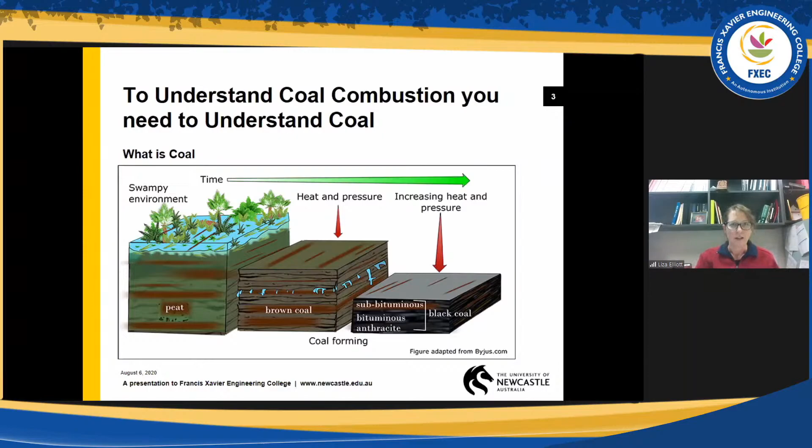The coal that does form is a function of where it's made. Coal generally is made in boggy areas, areas where water covers the ground pretty consistently. If it forms in areas where the ground is completely submerged to a large depth for a very long time, you have no oxygen content and you end up with putrefied, muddy material.

If it's formed in dry forests, rotting occurs, and so anything that does form to coal is usually very woody or has a large amount of resin in it. The places in between, where water comes and goes or is there at low levels across the ground, is really where peat forms, and that's what turns into coal. So you end up with humic material that eventually, with time and pressure, becomes coal.

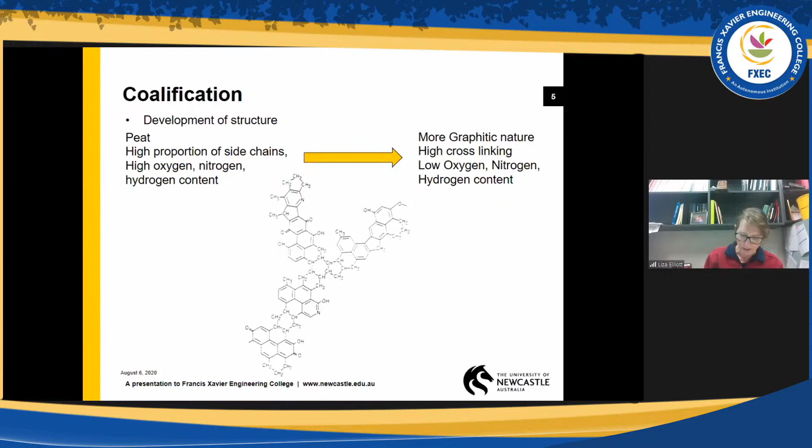So as you become more coal-like, or the rank of the coal increases, you're going to lose things like moisture - it's going to contain less moisture. You're going to lose the volatile content, and that's the stuff that will come out of the coal when you heat it. Those are the low molecular weight hydrocarbons, the things that are hanging off the side, and the things that bond between the rings of the aromatic rings.

You're also going to increase your fixed carbon content - this is the actual rings, the carbon in the rings that you've got in your coal. That's going to increase as the coal becomes of a higher rank, and the actual energy associated with your coal will increase as well. The vitrinite reflectance is a measure of how it reflects light, and that is what is used generally to determine what rank your coal is, or how close to graphitic in nature it is.

The other thing I should say is as you increase in rank, you will decrease the ash content. So things like sodium and potassium, which are very common in low rank coals, are not so common in the higher rank coals. They're things that are usually attached to those carbon chains, so you will lose them as well.

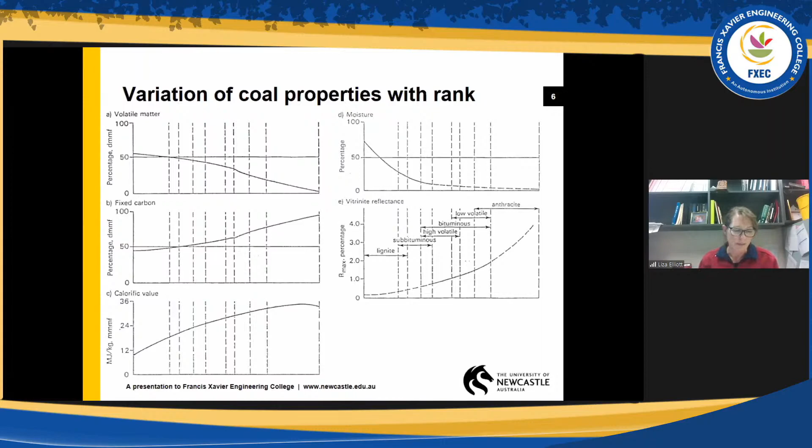So generally when we're talking about coals, we're trying to talk about their rank - so we're talking about that amount of rings in the coal structure. A lower rank coal, a lignite or a brown coal, will have more interconnecting chains, and they will have far more ash and far more moisture.

So this type of graph which we have here is called a Seyler's chart. This was developed by a British geologist, and most coals will fall into these ranges, although classification of the coals does vary from country to country.

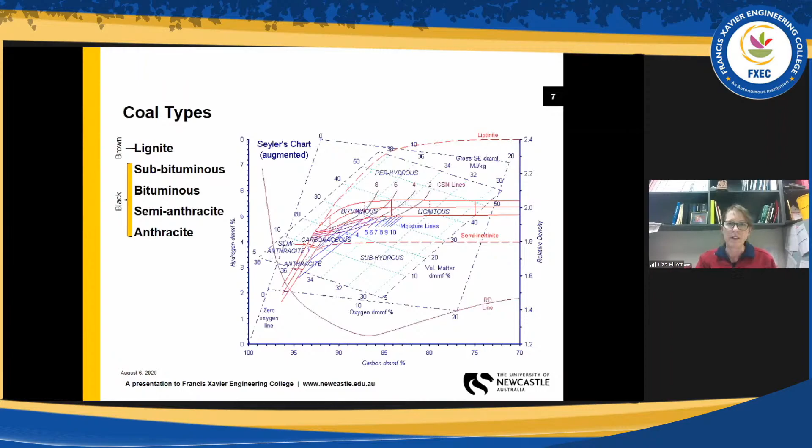But within a coal, there are different things as well. Within the carbon structure, there are things that will change based on where that coal has come from, or what part of the plant that coal has formed from. These are called the macerals. Generally, a geologist will look right down to the fine grain to find out which bit has come from where, but us engineers tend to work on the group.

We'll be looking at the liptinite content, which in America is called exinite, the vitrinite content, and the inertinite content. The liptinite content is the most reactive part of the material, but in Australian coals there's usually very little of it. The vitrinite content is the next most reactive part, and the inertinite content is the least reactive.

It was originally called inertinite because it was considered very inert and didn't do anything. But in the last 20 to 30 years, they've shown that inertinite has quite high reactivity, not as high as vitrinite. Vitrinite and inertinite have actually been found to overlap - the lower, less reactive parts of vitrinite will be less reactive than the highest reactive parts of inertinite. But in general, on average, vitrinite is more reactive than inertinite, and the reactivity of these materials changes depending on the rank of the coal.

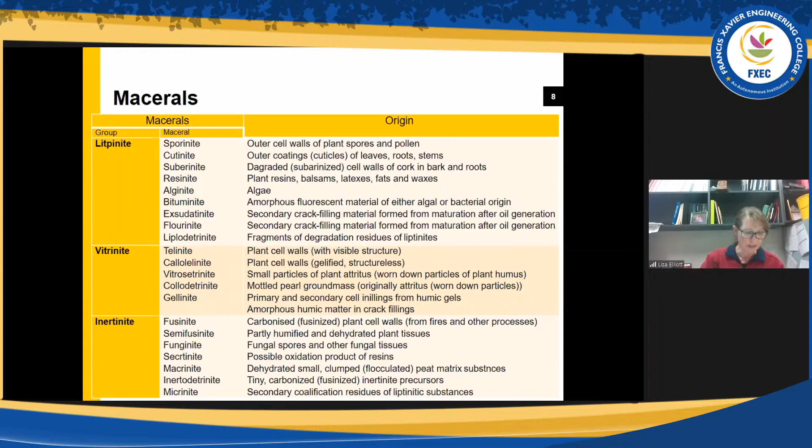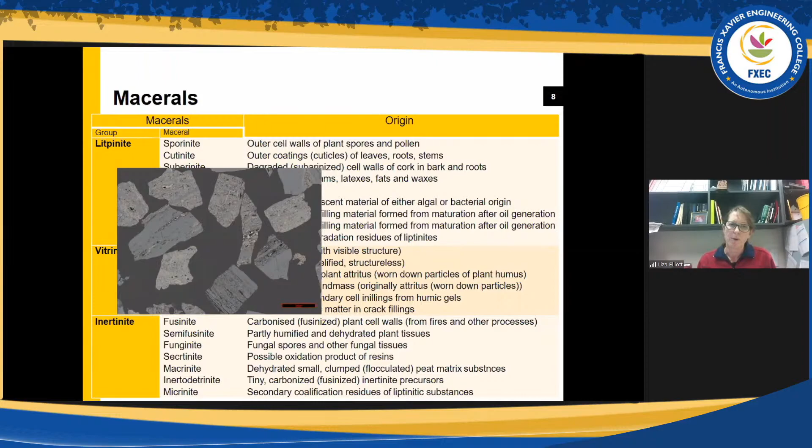If we look at the coal under a microscope, you'll see particles that kind of look the same. But the big point here is if we divide them up into vitrinite and inertinite, which we will here - the yellow ones are the inertinite, the green ones are the vitrinite, and the red coloured parts are minerals. You can see that some particles are all inertinite, some are all vitrinite, but there are also particles that contain both.

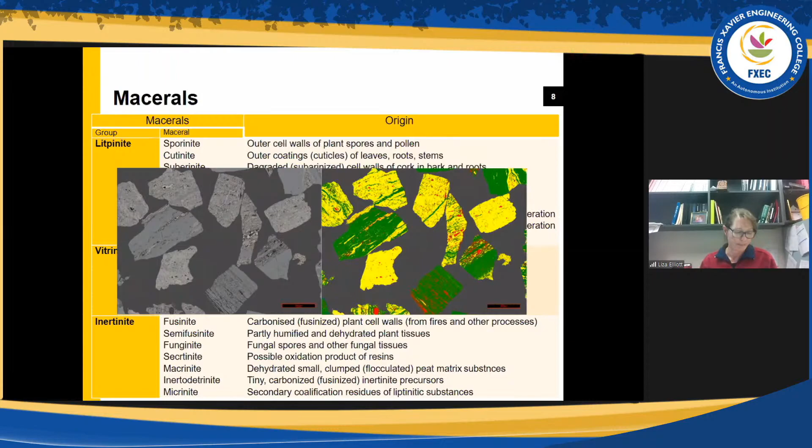The really big point to take away from this is coal is not a single material - it's a range of material. In fact, every particle in the coal will differ, so you can never talk about coal as one material. It always is a range. Quite often the issues you come across because of the combustion of the coal are a function of one part of the coal, not the whole lot, though most people will talk about the coal as an average. So coal is not a simple material - don't think of it as such.

On top of that, within those coal particles there's also minerals. This is an SEM image of a coal sample - you can see the dark red material is the coal, the carbonaceous material, and all the other colours are the minerals in the coal. It's not a consistent colour across it, which shows that the minerals are there in individual particles, or as particles on their own where they've been liberated from the carbon material during crushing. So again, you can't look at coal and say it's an average material - every bit changes, and you really have to be considerate that it's a heterogeneous material.

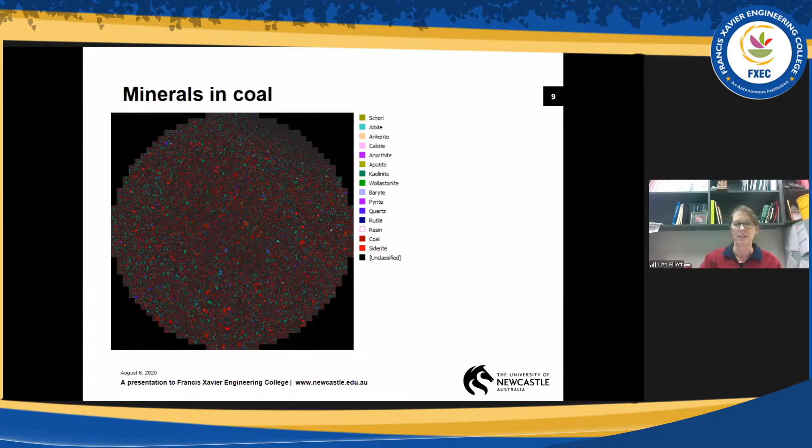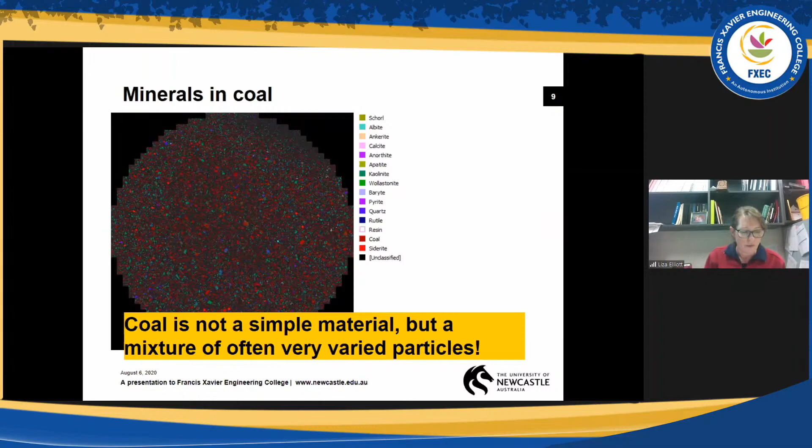So we know what coal is now. Where do we use it?

Coal's two main largest uses are power generation and steelmaking. Power generation in Australia is generally done in what's called pulverised fuel boilers, and I think that's pretty much the most common type of boiler around the world. In these, coal is fed through the burners into the radiant section, which is this section here - the radiant section is any part that sees the flame. The combustion gases then leave the radiant section and head up through the boiler, through this area here, and then out.

The boiler is really a very large heat exchanger. Each surface of the boiler, all the walls, are covered in tubes. In the top area, in the convective bank and the economizer, these areas here, the tubes hang down into the gas stream in an effort to get as much heat out of them as possible. Those tubes raise steam, and the steam is then taken to a turbine to generate electricity.

So the things to note about using coal here is that it's a combustion process - that is, it's an oxidizing process. There's always excess oxygen, so the coal will always be looking to burn out.

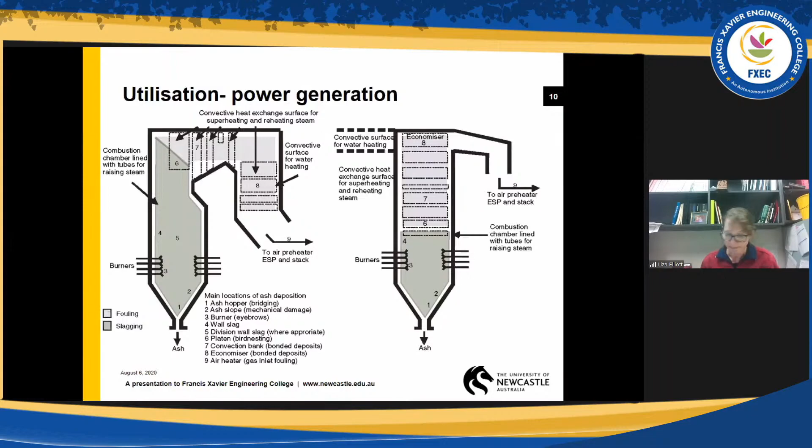The other use that we predominantly use coal for is steel making. To make steel, you need iron, and iron is generally made in a blast furnace. So to make iron, you make coke, and put in layers of coke and iron ore into the blast furnace.

As the iron ore is reduced and the coke is consumed, those layers move down through the furnace, allowing more layers to be put in on top. Now that coke is made in a coke oven.

So the coke oven over here - the coal is fed into the oven, it's sealed, it's heated, and then the coke goes through a change where the volatiles are driven off. There is a liquid layer formed that allows the coke to swell, and once it's all finished and cooled down, the coke is structurally very hard, and that has strength that's able to support the extra weight on top of it when it goes into the blast furnace.

In the blast furnace, the oxygen or hot air is introduced through the tuyeres. That initially combusts some of the carbon, some of the coke - or they inject coal in through the tuyeres as well - so that you can produce a lot of energy, because the rest of the reactions inside a blast furnace are endothermic. So you need heat to actually get things going.

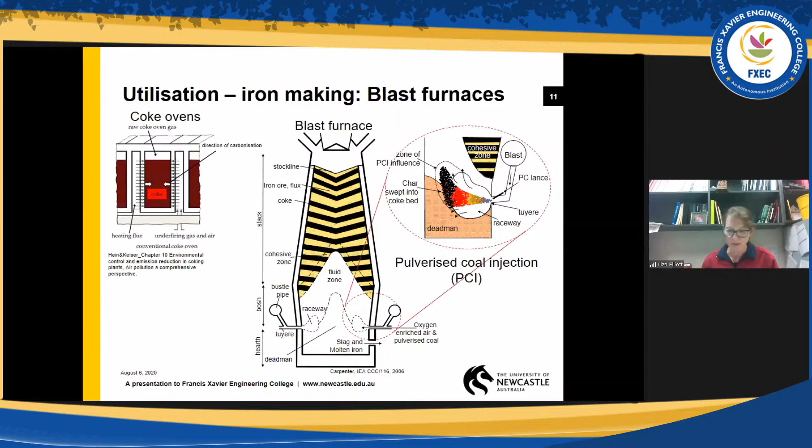The other one I wanted to mention was gasification. The reason I wanted to mention this is that it really highlights the importance of the atmosphere that the reactions are occurring in. So gasification is used either to make power or to make chemicals.

Initially, the coal is injected into a combustion zone where the coal is burnt. That provides heat to drive the gasification reactions, so to make CO and H2.

But that has to be done in a reducing environment. The top of this chamber is a very reducing environment, whereas just down here it's oxidizing, in an oxygen stream with coal. So balancing the chemicals is very important.

The other part of this is heat transfer to recover the heat that's produced. So very high temperatures, but very reducing environment. But it does make a very productive gas, and that gas can be burnt in a gas turbine to make electricity, or the gas can be used to generate chemicals, to make hydrocarbons. They're the building blocks for any type of hydrocarbon you want.

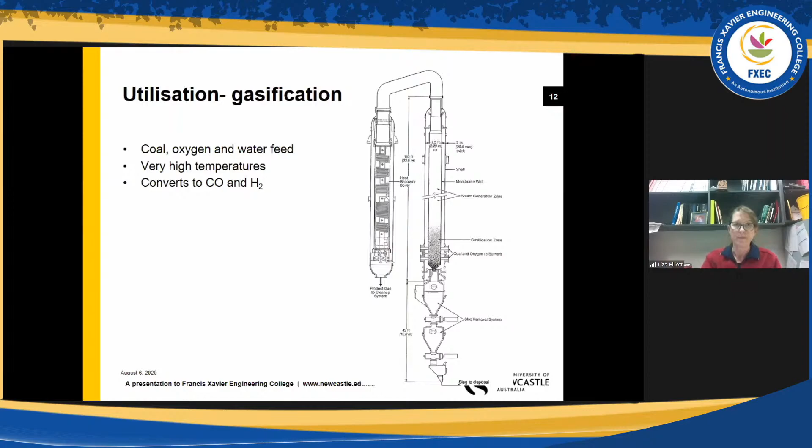Okay, so we know where the coal's going to be used. How do we know what coal we should use where? That is done by characterising your coal. There are a whole heap of standard analyses and a range of non-standard analyses.

The standard ones, done for almost every coal except maybe the coking analyses, which are only done for coking coals, are moisture. There's three types of moisture you will end up with. Free moisture, which is basically just drying the sample in room atmosphere. Inherent moisture, where you dry the sample till it's bone dry at a temperature above 100 degrees. And then total moisture, which is the free moisture plus the inherent moisture.

There's proximate analysis, which gives you the volatile content, that is whatever will be driven off when you heat the coal. The fixed carbon, so once you've lost that volatile content, what's the carbon associated with those rings. And the ash content - once you burn a coal, how much of the minerals have converted to ash and what is left behind.

The ultimate analysis is a chemical analysis which gives you the carbon, hydrogen, oxygen, nitrogen, and sulfur content. The specific energy tells you the energy in each coal. The ash oxide analysis is measurement of the chemical constituents in the coal on an elemental basis, but reported as oxides. The reflectance is very important if you want to know your rank, and that's one of the first questions most people will ask you.

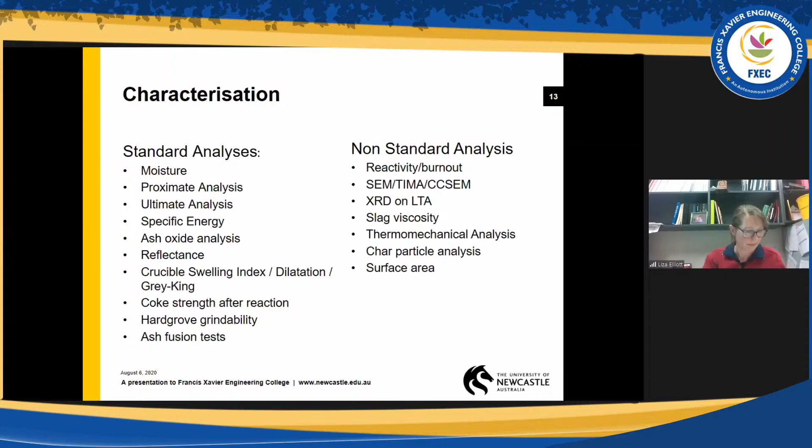So what happens when you heat coal? Initially, the first thing that happens when you get to about 100 degrees, moisture comes off. If you keep heating to about 450 degrees, depending on the coal, the small chain hydrocarbons will break away, and often they will come off the sample, and they are classed as volatile matter.

If the temperature gets above ignition and the atmosphere is oxidizing, these volatile components will spontaneously combust, and then ignition will start. I'm not going to talk about ignition today, I'm going to leave that to Farida. That was her PhD area, and she is by far a greater expert on that than me.

The volatile matter that you do get off, as shown by this graph, is a function of the temperature that you heat it to, the time you're at that temperature, the heating rate you take to get to that temperature, and of course the nature of the coal, so what chemically is actually present in the coal.

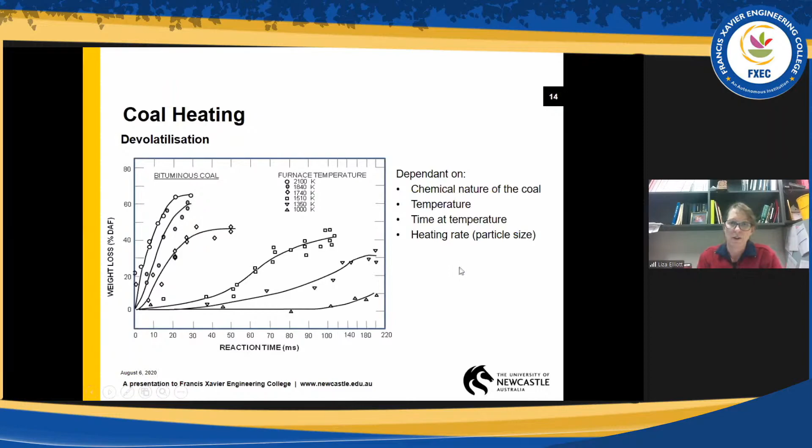But also what's happening to the coal when it's heating. We're removing those interlocking bonds, those bridges that join between the aromatic chains and the side chains that are on those aromatic rings. When that happens, it interacts with those aromatic rings and the chemical nature of the coal changes. This is called a metaplast. It turns into a liquidy plastic type material.

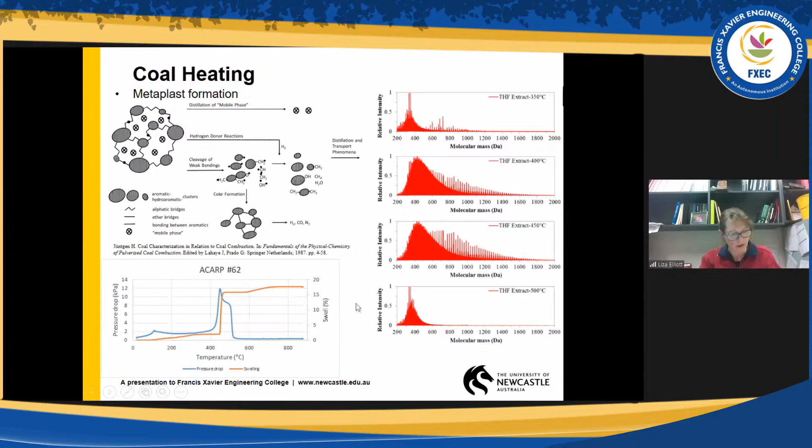So what happens to the char once you've gone through this metaplast phase? What forms depends on where it comes from and how much metaplast you actually make. If you're using a coal that's predominantly made of vitrinite, it's more likely to form a metaplast, because it's got more hydrogen content, and more likely to form a char that is swollen.

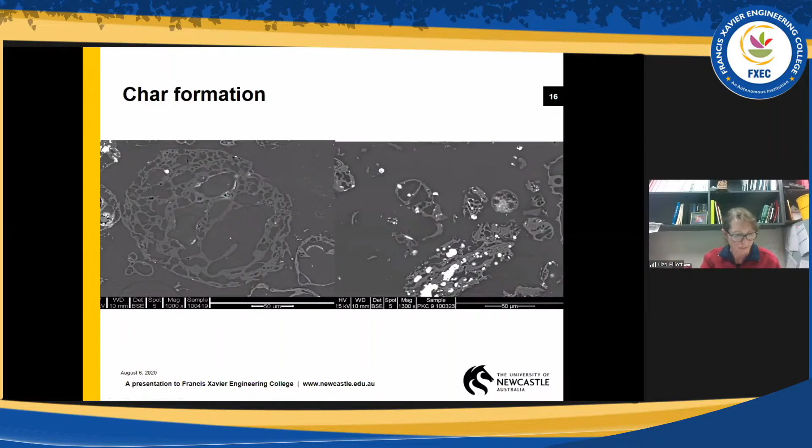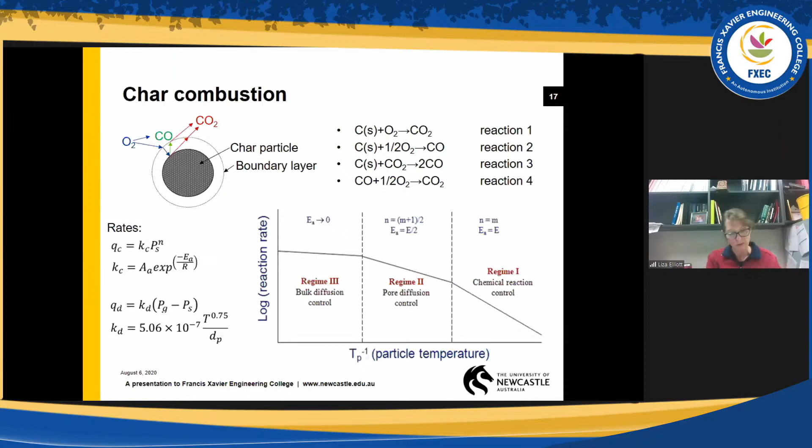For completion, we need to talk about gasification, because if you're in an area where you don't have enough oxygen, gasification will occur. The problem is gasification is endothermic, and therefore it's a much slower reaction rate than oxidation.

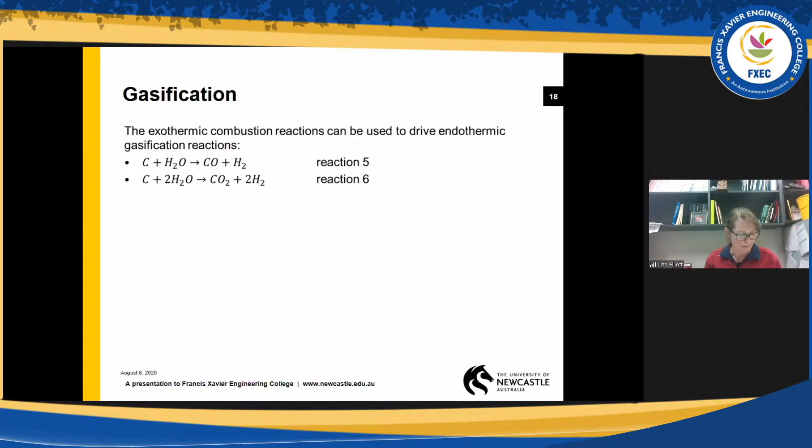The other point about what happens to the coal is the char will graphitize if you leave it under temperature for long enough. So depending on how long combustion occurs, you'll be changing the behaviour of the char - the structure will continue to change. Even though it's burning, it will keep moving towards a graphitic nature. So the longer the reaction takes, the more likely what's left over is going to be unreactive because it's more graphitic in nature.

We also see that the higher the temperature the char gets to, the less likely it's going to be reactive, because it's become more graphitic in nature. We have two ways of measuring the graphitic nature of the char. One is to actually measure the crystalline structures that are formed - we do that using an XRD, where you can measure LC and LA.

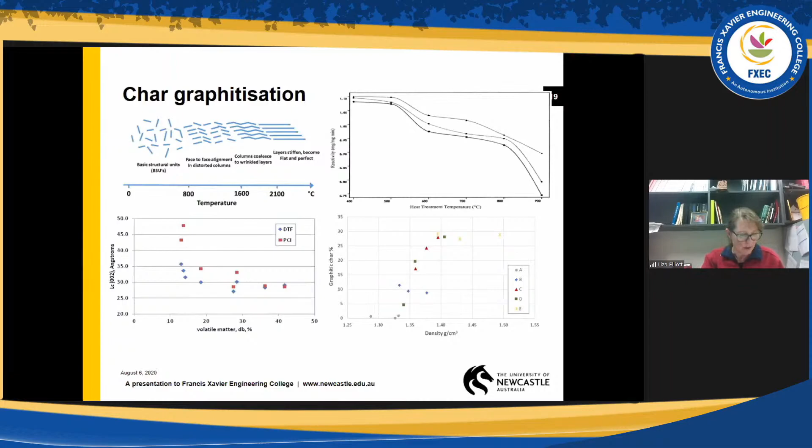The other thing to note is what happens to the minerals. You're combusting the coal, you have minerals in that coal, and we know they turn to ash, but how do we get there? Each type of maceral will form different types of chars, but it's also a function of which minerals were there at the beginning. So if you have a coal that's predominantly vitrinite or highly reactive liptinite, you're going to form Type 1 chars, and they're very high porosity, very thin walled.

Now, if those walls, as that char is eaten away during the oxidation reaction, those minerals are less likely to join together. So the minerals will separate into individual parts of char as the char is burnt out, and they won't join together, and you'll form a very fine ash material.

Type 2 chars are intermediate ones. So they're the less reactive vitrinite, the more reactive inertinite. They have smaller porosity, thicker walls, but some of the minerals in the char will have the opportunity to join together because they're close enough in the char and the char is large enough to sustain them together until they reach a melting temperature where they can join.

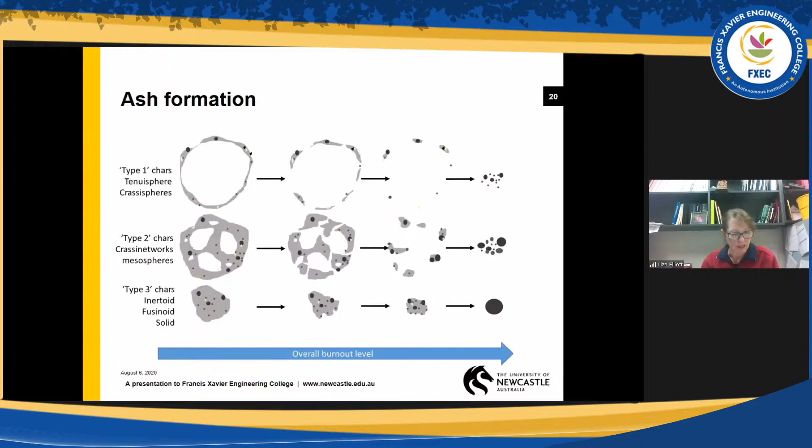That's important because when you're talking about deposition in a boiler, the size of the particle that's formed, and the density of the particle, which is a function of its chemistry, will depend on whether it deposits on the tube. There are lots of different mechanisms for deposition, but most of them are a function of density, particle size, or the momentum in the gas stream, and also the viscosity of the resulting ash particle - that is, how sticky it becomes.

And then when it hits the wall, when it gets onto the tube, how thick a layer is it going to form, and how solid is it? How much porosity does it have? Because that will greatly affect how you operate.

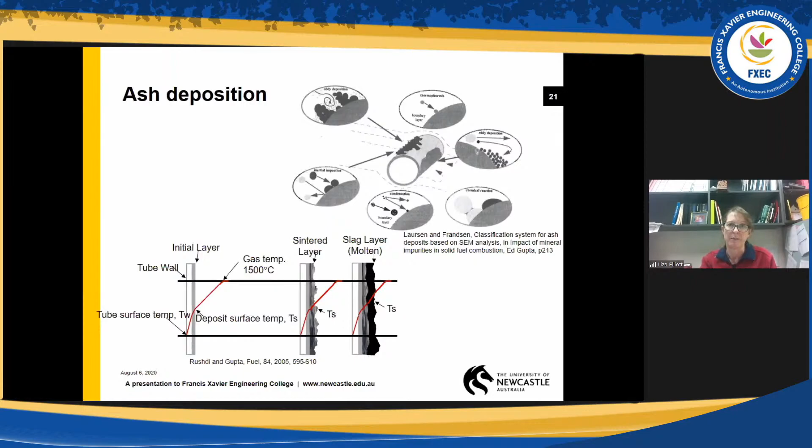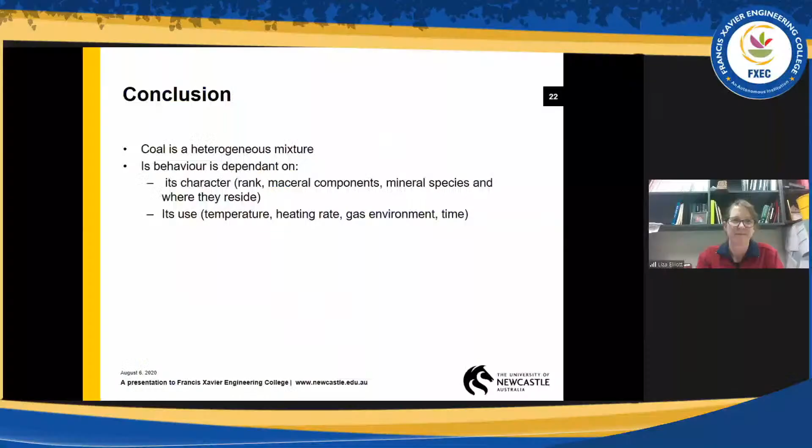At the moment, there's so much carbon dioxide produced by one power station that there's no way we could possibly use or utilise that amount of CO2 in any way. So we really do need to change the way that we operate. We either need to find alternative solutions, or we need to capture the CO2 and do something with it.

The most common approach I've been involved with is capturing CO2 by changing the way the boiler works, so we recycle the off gas back through the boiler to make a stream highly concentrated in CO2, with very little nitrogen and oxygen. Instead of injecting air, we inject oxygen and use the recycled flue gas to temper the reaction in the flame, so it's not all in one small area, and you can still use the boilers we normally use today. That gives a reasonably clean, concentrated CO2 stream, though not pure.

Then you need to do something with that CO2. Some people have looked at sequestering it underground. In Australia, the problem is finding a suitable place — not all places will take the CO2 and keep it. There are areas where the geology isn't good enough and the CO2 comes back to the surface. There's also talk of putting it into aquifers, since CO2 dissolves in water, but again it depends on where they are and how close to the surface. The best solution so far in Australia has been using CO2 to enhance oil production — pushing it into oil wells increases the amount of oil you can extract. That's the best solution so far.